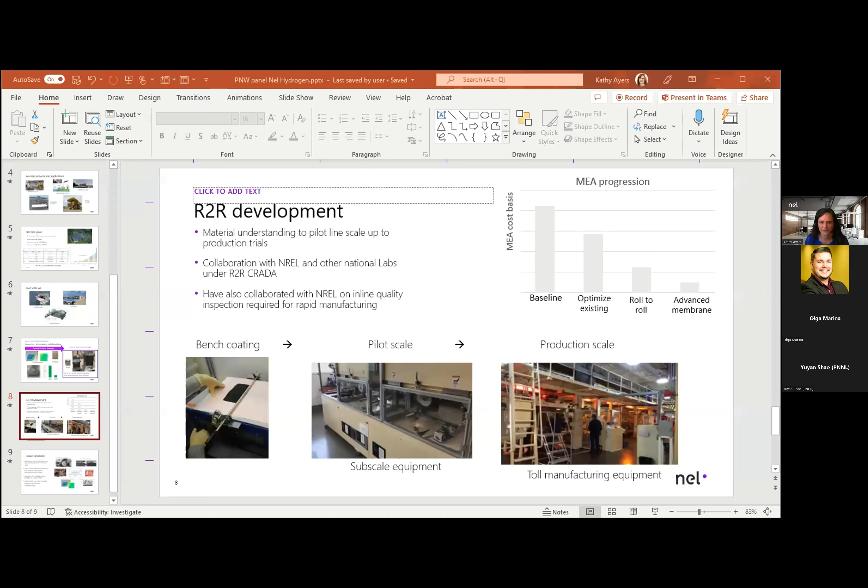All right, so I'll just quickly give a little bit of background on NEL so the other panelists can do the same for their companies and get into the Q&A. But for anybody who doesn't know who we are, NEL is about 500 employees. We're a pure hydrogen company focusing on water electrolysis and hydrogen refueling. So we have two production facilities on the electrolyzer side, one in Wallingford, Connecticut, which is where I'm based. That's where we make the PEM systems.

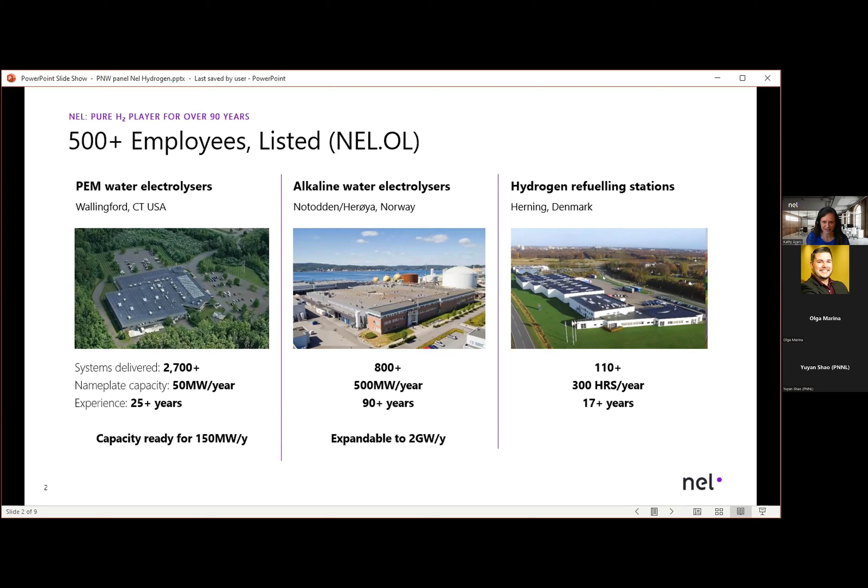We currently have been producing up to about 50 megawatts a year, but this facility can do about 150. And we are currently looking for a new site to expand. In Norway, we produce the alkaline electrolyzers. So we have a fully automated plant that was just commissioned this year, which is currently capable of 0.5 gigawatt of alkaline electrolysis, and they've already started procuring equipment for the second line. The building has space for up to 2 gigawatts. And then on the refueling side, we have a factory in Denmark, which can do up to 300 stations a year.

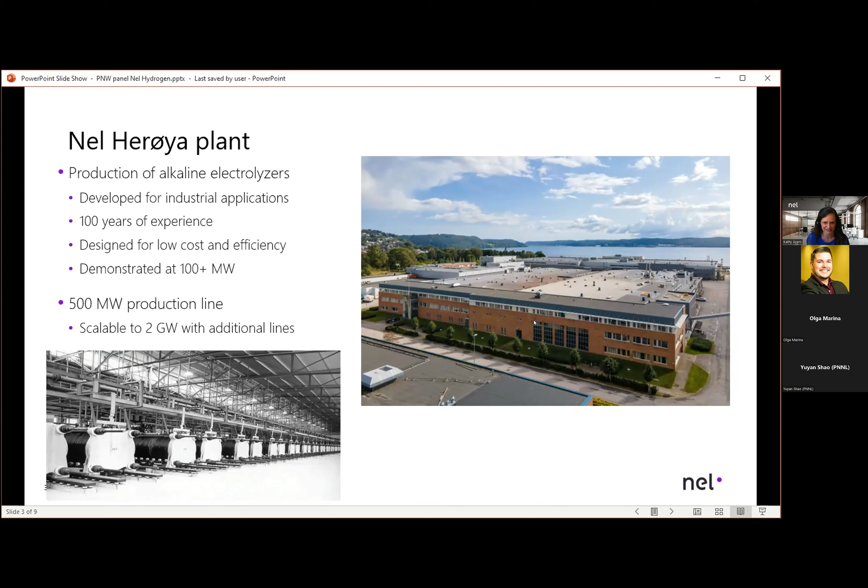So a little bit more on the Herøya plant. As I mentioned, this produces our alkaline electrolyzers. These systems were really developed for industrial applications from the beginning. So a lot of the cost has been taken out, but there's still room based on how old this technology is to incorporate modern automation, new materials, et cetera. But the NEL legacy goes back 100 years. And we've already demonstrated this technology at 100+ megawatts. There's a picture down below of one of our factories that operated for about 40 years. And as I mentioned, this new facility can produce up to 2 gigawatts.

Just some of the examples of projects on the alkaline side that are either already installed or have been announced, just to give a sense of the scale of systems that are going up today and what types of applications. So we have electrolyzers feeding a chemical process, which is about 9 megawatts of capacity. There's areas looking at home heating. That particular project is 5 megawatts to serve a community. Green steel is similarly about 5 megawatts for this particular demonstration, growable to much larger. And then mobility and mining are two of the other applications that we already have systems going into. So there's a wide variety of areas where renewable hydrogen can impact, and there's lots and lots of projects going on around the world for both PEM and alkaline.

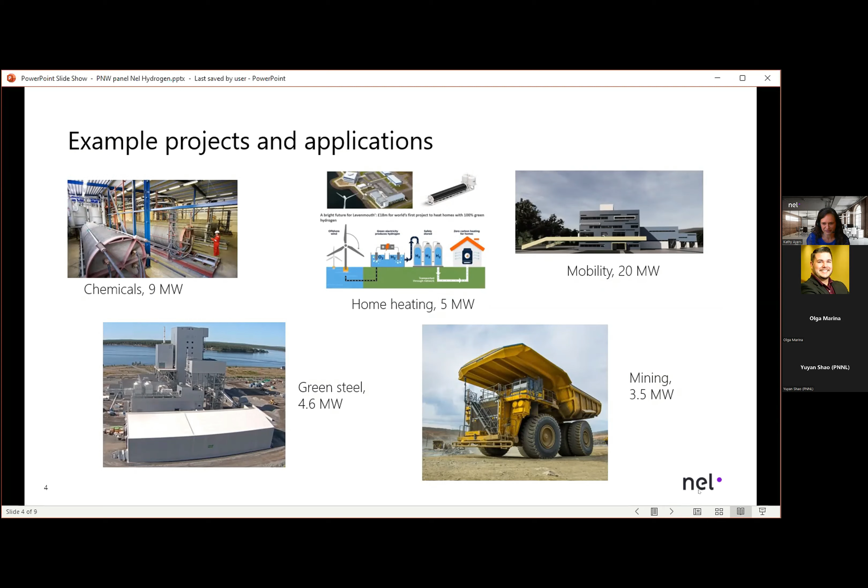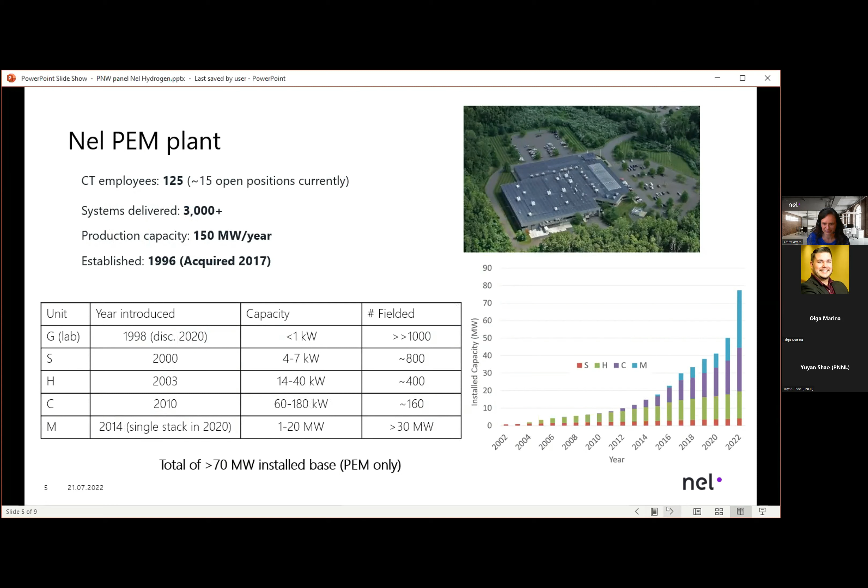Our Wallingford facility has about 125 employees, and we're growing rapidly. We hired somewhere in the neighborhood of 15 to 20 positions last year, and we have another similar amount open right now with continued growth expected. We've delivered over 3,000 systems to date. And you can see the growth in terms of the types of units that we're producing and the total installed capacity base over time. So we have systems in the 100+ kilowatt range going back more than a decade. And our megawatt platform has been around for about 8 years now. So we're growing quite a large base of products in these areas with about 70 megawatts installed to date, and several more projects that have been announced.

In terms of where the PEM products are mainly going, it's really more suitable for things like offshore wind applications because of the footprint needs, as well as the fact that you're tying directly into a wind turbine and the response times needed. We also have several projects in bus and truck fueling around the world. This particular one is in California. And we also have a green ammonia project that we've been doing with Iberdrola, which is the largest PEM installation that we have at 20 megawatts. And that is in the process of being fully commissioned, and has been partially commissioned this year.

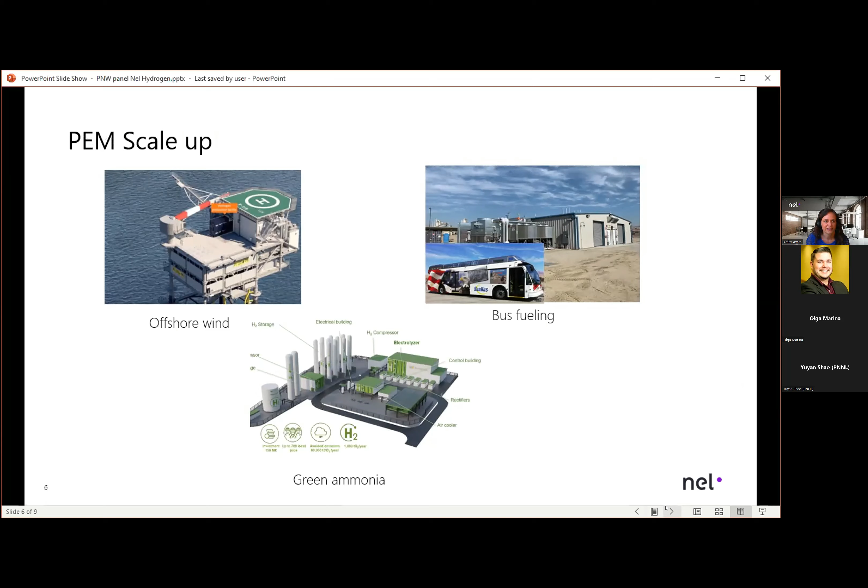One of the topics we were asked to touch on was benefits of lab and industry collaboration. This is a slide I've presented in other forums because it's a great example of how we can move from conceptual design and fundamental understanding all the way to commercial production. This was our bipolar plate project implemented several years ago. I still have my ECS Transactions paper from 2010 referenced a lot of places, and I have to keep saying it's not accurate anymore, because at that time the bipolar plate was the most expensive component in the stack, but this project changed that.

This was a project where we went from a clean sheet of paper, analyzing different plate designs, looking at stresses and flow characteristics. We worked with Oak Ridge to look at different coatings and how that impacted hydrogen embrittlement in the part, and we looked at completely different ways of manufacturing the plate. Through this effort, we were able to reduce the cost of that component by effectively 80%, in terms of both the manufacturing changes and the scale up that we did.

This component really forms the basis of our two largest cell stack platforms. We developed it initially at about 100 square centimeters and then scaled it to 700 and almost 1600. We've fielded thousands and thousands of cells with these configurations.

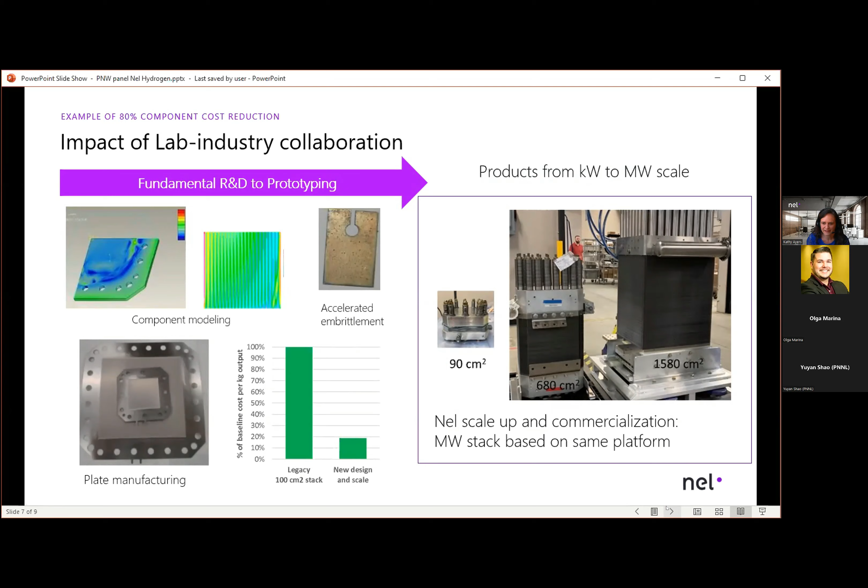Finally, looking more forward, roll-to-roll development is another area where we've been leveraging a lot of lab capabilities. This is now the most expensive component in the stack, the membrane electrode assembly. So understanding how we move that from a fairly low volume manufacturing process with thick membranes and high catalyst loadings to a much more streamlined part.

We've been working on this for a few years now through a DOE project that we've now moved towards an internally funded project to commercialize it, and that's actively underway. We started from understanding all the different materials, the ink formulations, the coating parameters, to scaling it up with a pilot line. This is an example of the roll-to-roll coater at NREL. We've also worked with Oak Ridge, scaling that to more of a production scale on toll manufacturing equipment before we go ahead and purchase our own.

We had a collaboration here with NREL and Oak Ridge, and there were other national labs involved in the roll-to-roll CRADA, which I know Plug has been involved in as well. NREL is also helping us figure out how, if we can make the parts, that's one thing, but we also have to inspect them at the same speed because you don't want to be making a bunch of scrap. That's an area where they have expertise as well.

So you can see, moving from the baseline, there's so much we can do in optimizing the process we currently have, but really moving to roll-to-roll and more advanced materials is what brings us down to those similar cost reductions as we saw with the bipolar plate.

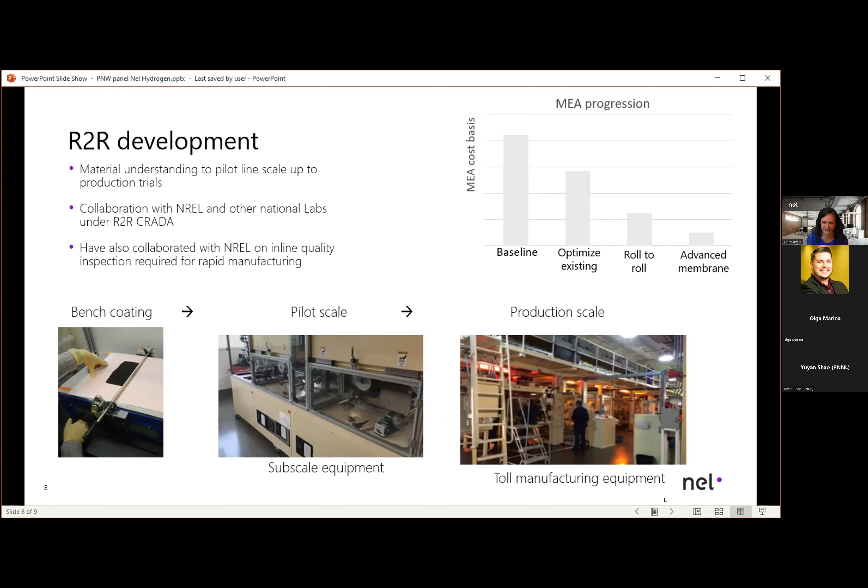So finally, just some thoughts. I think electrolysis is going to go through a lot of transitions in the next few years, a lot of scaling up in manufacturing of components and stacks. There's a lot of opportunities for material and process optimization throughout the supply chain, moving to robotics, automation, lowering the amount of noble metals we're using, et cetera. All of that requires high strength and fundamentals because we need to maintain reliability and quality over all kinds of applications, duty cycles, et cetera. I think that partnerships certainly result in faster progress and deeper understanding there.

So I'll turn it back to Olga.

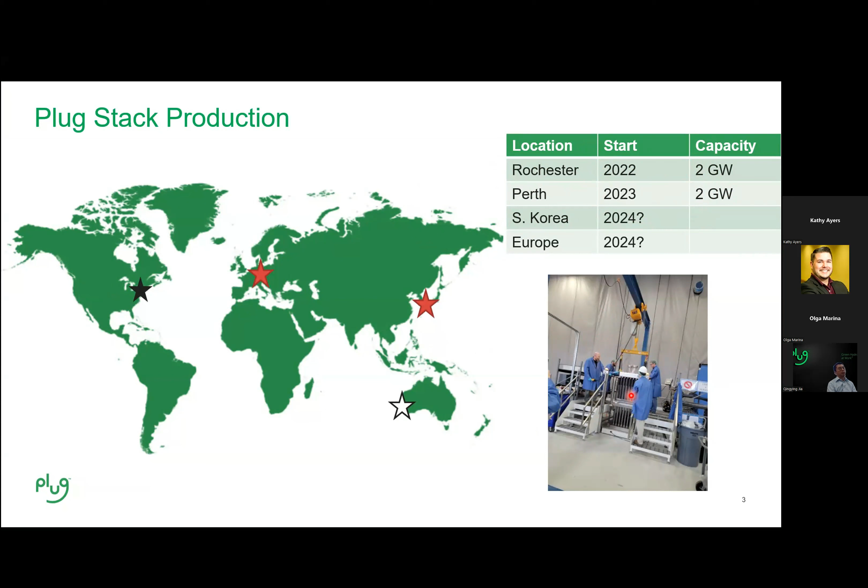So for a typical example, the 1 megawatt system can generate around 425 kilograms of hydrogen per day. And in addition to these,

And the plan is to generate 500 tons of hydrogen per day in North America by 2025, and 1,000 tons per day globally by 2028. That is basically the plan.

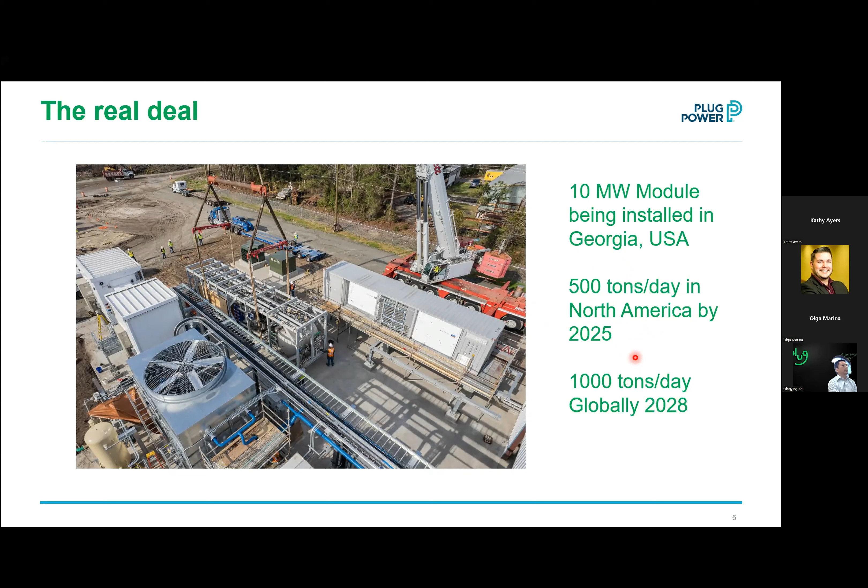One of the major R&D efforts here at Plug is to reduce the cost of the electrolyzer, or the green hydrogen, to make sure green hydrogen is competitive with other energy sources.

On the left side is a typical cost analysis of a typical MEA. So for the past 2 years, we have been able to reduce the cost of the MEA by more than 50%, from here down to here.

In the future, by optimizing the MEA, there are 2 directions to reduce the cost. If we maintain the current density and increase the efficiency from 75% up to 85%, we can reduce the cost of the energy by around 15%.

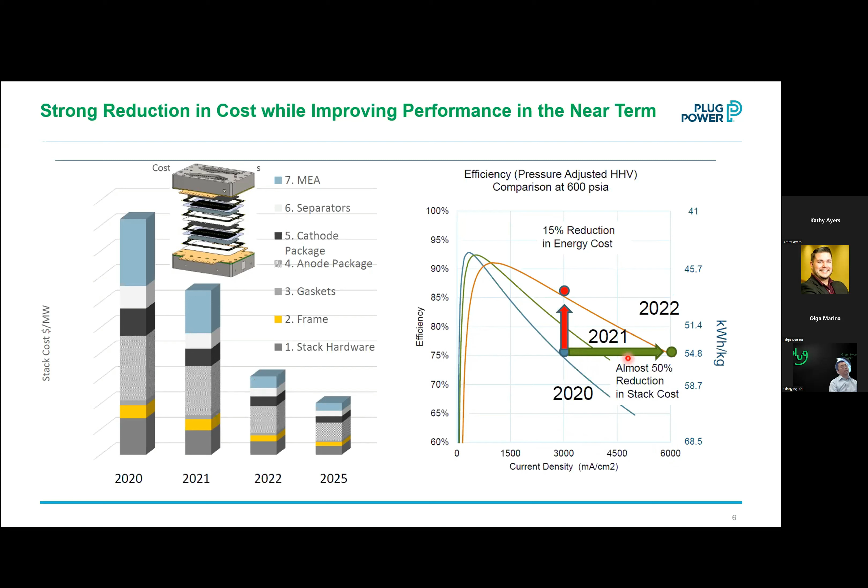On the other hand, if we maintain the same efficiency but increase the current density from 3 amps to 6 amps, we can basically reduce the cost of the stack by around 50%. That is a big saving, and the major reason behind that is we can use less stack to make the same amount of hydrogen per day. So those are basically 2 major directions to save the cost.

There's another concern with the electrolyzer, or the green hydrogen generated by it: the use of iridium. Iridium is not only expensive because it is the rarest noble metal around the world, as shown on the left side, but right now we generate approximately 8 tons of iridium per year, as shown here.

Because of the very limited source of iridium, the iridium price has increased very sharply recently due to increasing demand. So it becomes a very expensive part of our MEA. But that is not the only concern, and not the major concern.

The major concern is we don't have enough iridium to support all the electrolyzers, because the electrolyzer industry has been expanding very fast. You can see the sharp increase in iridium price here is probably due to demand increase by the electrolyzer, and there's also other demand for iridium. So I think there's a mismatch between the iridium we have and the iridium in demand.

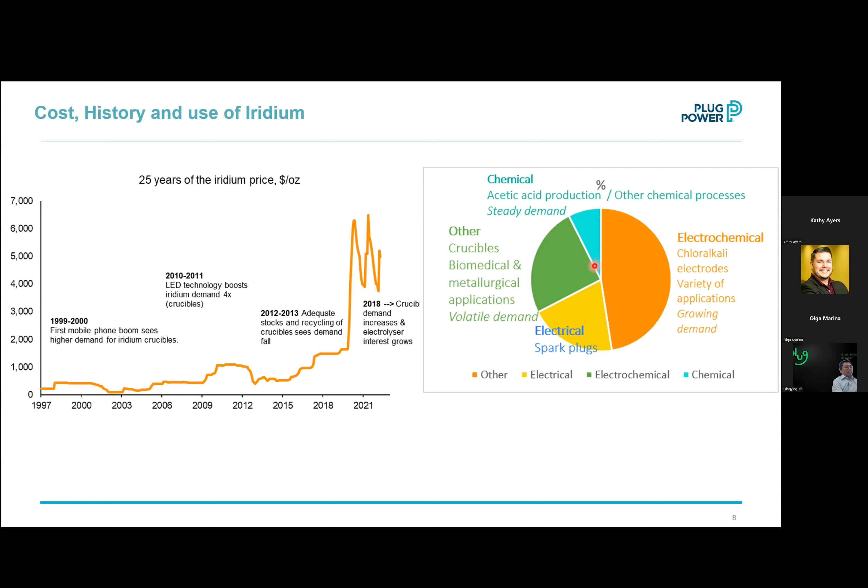So one solution is to decrease the iridium loading in the PEM electrolyzer. Fundamentally, it is feasible because, according to the fundamentals of chemistry, at higher current density we need less iridium. For example, at 0.5 amp per centimeter squared, you can see the performance is reduced with lower iridium loading.

But if you go to like 5 amp per centimeter square, the performance is around the same, even with very different iridium loading. So that is basically the fundamental feasibility of lowering the iridium loading.

Practically, there are several kinds of advanced iridium-based catalysts that can decrease the iridium loading by 1 order of magnitude. For example, the top one is a typical supported iridium catalyst developed by Giner and now at Plug Power. The bottom one is another supported iridium catalyst developed by 3M.

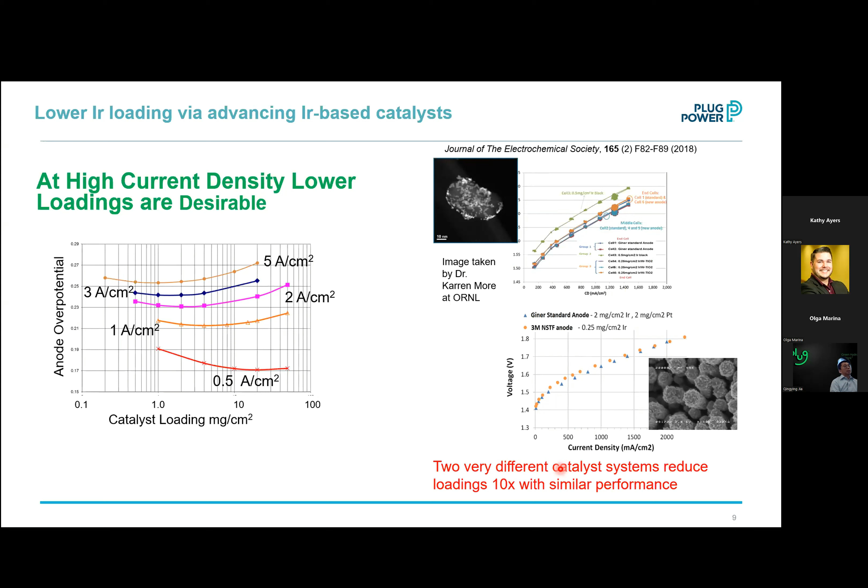Even though these are 2 very different catalyst systems, they can basically reduce the loading by 10 times with similar performance. Which means practically it is possible to reduce the iridium loading without sacrificing performance, which can potentially resolve the limited source of iridium issue.

This is basically an estimation of how much iridium we need in the future and the cost.

So around 2032, if we can increase current density to 6 and reduce the iridium loading down to 0.1 milligram per centimeter squared, we can reduce the cost down to nearly $2,000. Let's say by 2032 we can reduce the loading so the iridium cost is around $10,000 per megawatt. And if we increase the lifetime to 20 years, the cost for the iridium is like 1 cent per kilogram of hydrogen. It's not too bad, assuming 8% cost of capital.

But you can see from here that it is very important to increase the lifetime—not only can that reduce the cost of the iridium, but it also makes recycling less important. The shorter the lifetime, the more important recycling becomes. If the lifetime is 5 years, recycling can significantly reduce the cost of the iridium. But if it's long enough, recycling plays a minor role. So this is basically the vision regarding whether we can reduce the iridium loading and whether it is feasible.

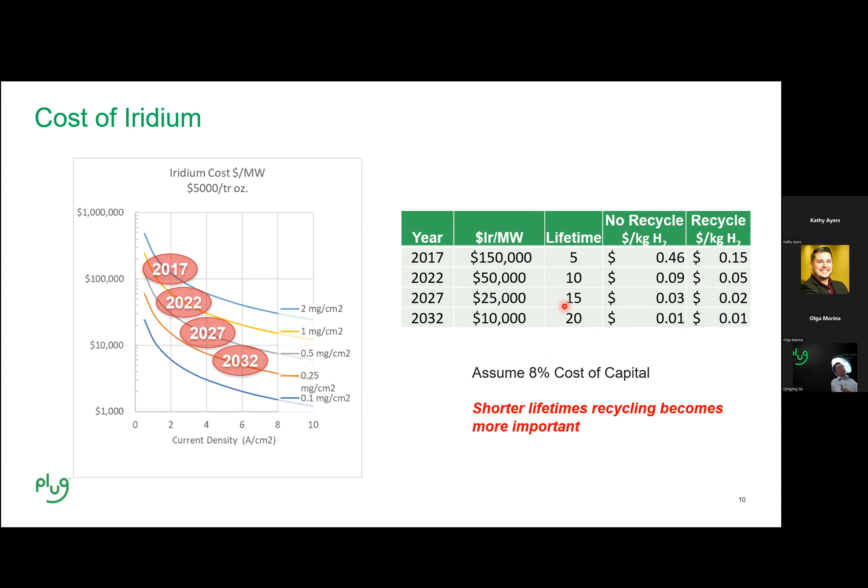But the key question is—I think here we need a lot of R&D help from national labs and universities—how we can reduce iridium loading down to 0.1, and in the meanwhile increase the lifetime, which by far is the most difficult and tricky challenge there. I believe by far nobody knows the answer. That is where the R&D, and also our R&D team at Plug, is working. I think this is a big direction, a big challenge to go. And that'll be all. Thank you.

Thank you very much. And you almost answered all my questions that I was going to ask you.

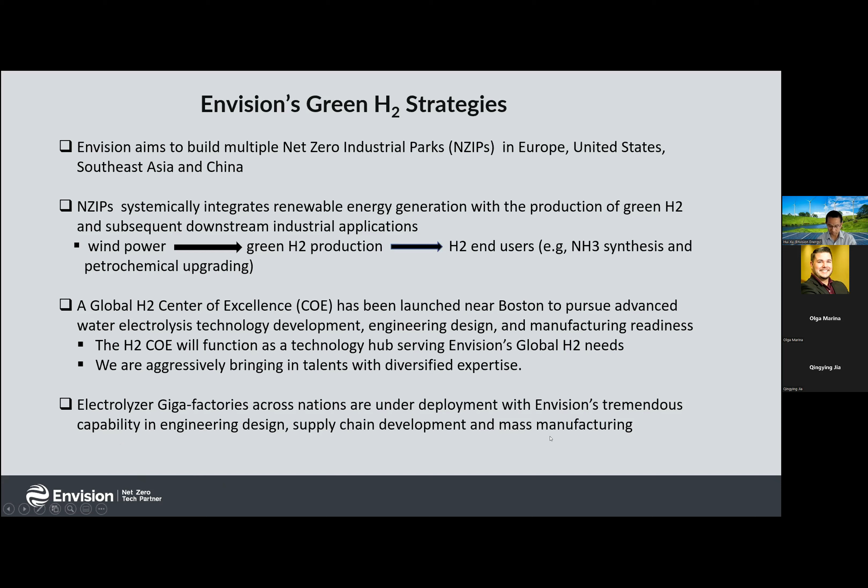This is only the center. In the meanwhile, Envision is also looking at giga-factories across different nations, currently under deployment, because Envision has tremendous capability in engineering design, supply chain development, and mass manufacturing. Looking at Envision's electrolyzer technologies, we've focused on low temperature water electrolysis technologies, but with different focuses.

One is alkaline liquid electrolyzer technology. This has existed for many decades but has gained momentum recently because of its low price. For this technology, we are working hard to improve current density — currently for commercial products it's only about 500 milliamps per centimeter squared, and we hope to improve it by 3 or 4 times.

For the PEM electrolyzer, the focus is cost reduction. Jia talked earlier about iridium price, and Cassie talked about other expensive components, so Envision is trying to use our expertise and resources to reduce the cost tremendously.

The last one is AEM electrolyzer technology, which is more advanced. Right now the concern is lifetime, so we are working with some membrane companies to try to improve the lifetime of this AEM electrolyzer.

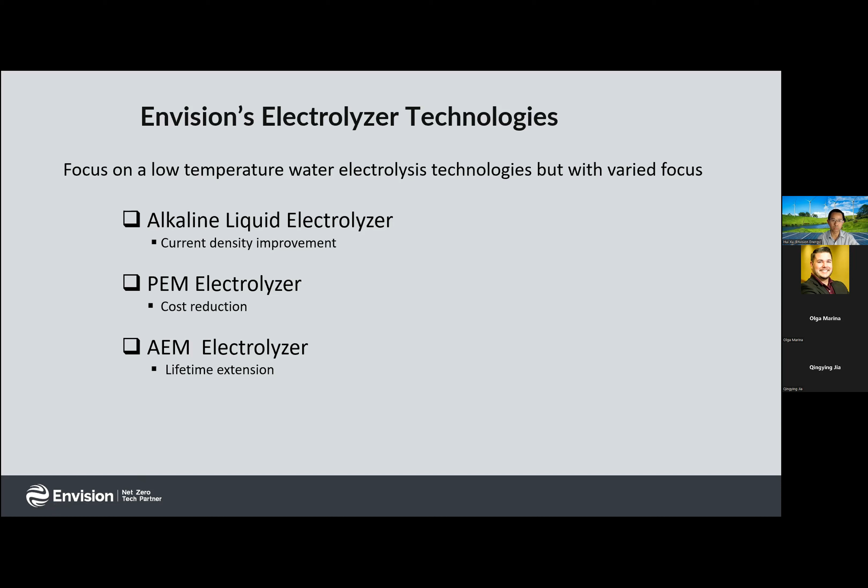So all three of you were talking about different electrolyzers for hydrogen production, but there are other technologies to produce hydrogen. What is the most appropriate way to make green hydrogen? Would it be alkaline, PEM, SOEC electrolyzer, or should we also consider methane pyrolysis and fossil fuel conversion with carbon capture?

I would say the simple answer is whatever's cheapest for that set of conditions. I think there's room for a lot of technologies. High temperature is good when you have a heat source, though it's maybe not quite as mature as alkaline and PEM yet, but I think that's where its sweet spot will be. Alkaline is good for large areas where you have plenty of space and relatively slow ramp rates, and PEM is good for more constrained environments and high dynamic range.

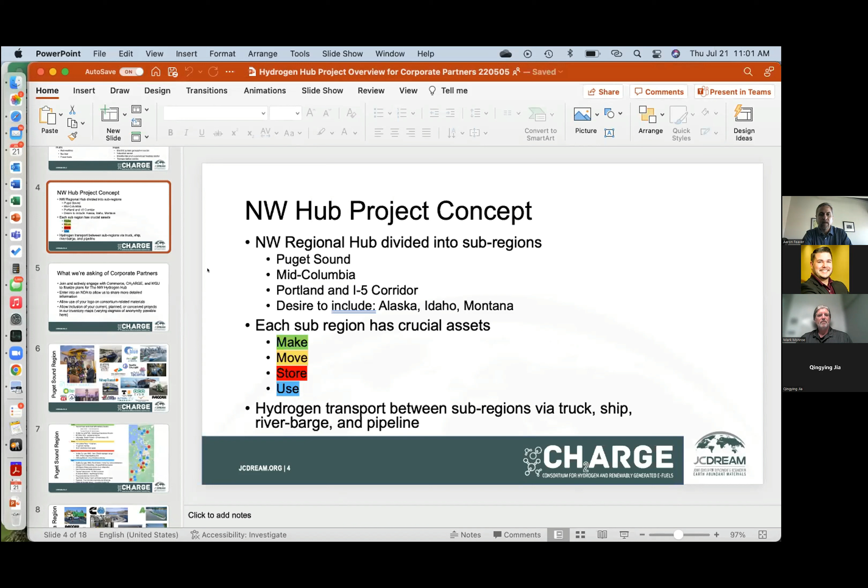I might share a couple of slides real briefly to show you guys what we're thinking about here with the Pacific Northwest Hydrogen Hub. I'm going to share my screen, hopefully that works. Okay, I think that's working. So the concept here is... is that working? Yeah, perfect.

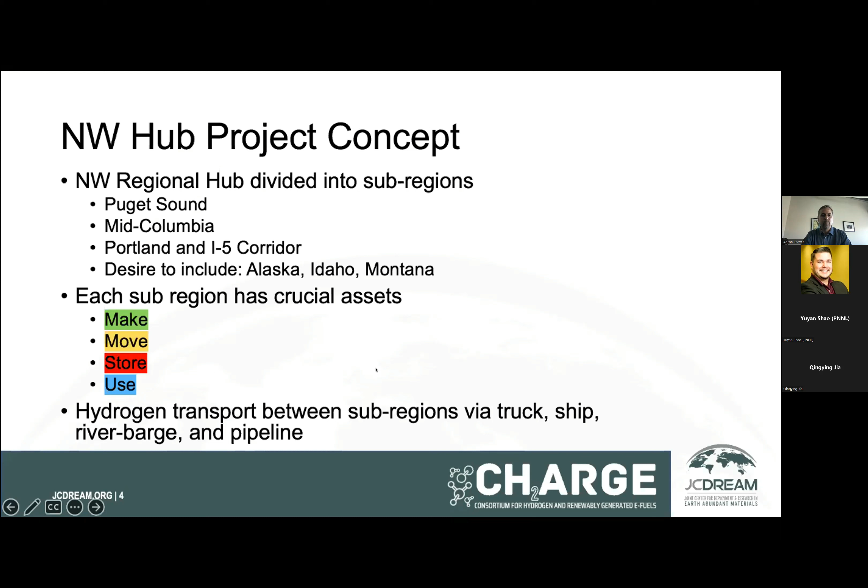The Northwest Hydrogen Hub, we're going to divide up into subregions where we want to geographically align the production, make, move, store, and use—production, transport, storage, and consumption of hydrogen—all in geographically compact regions, and then provide hydrogen within those subregions. This is a handful of the different types of things that are already going on around the Puget Sound region. We've got companies like First Mode that have developed hydrogen earth movers. We've got All American Marine, which has developed some of the first hydrogen ferries. There's a big emphasis on ports.

Here, I'll show you all—I don't know if that shows up or not. I'm actually at the Port of Seattle right now talking about how we utilize hydrogen to reduce emissions in port operations, oil refineries in the Puget Sound region. All of these are areas where we're putting some emphasis. This just kind of shows you some of those make, move, store, and use projects that are going on in the region around the Puget Sound area.

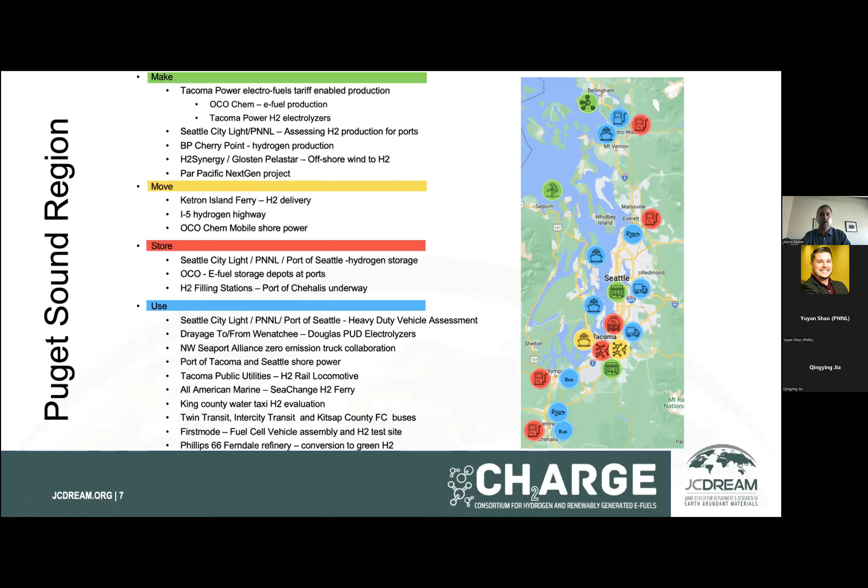In Eastern Washington and Northeast Oregon, we have a similar story. There are a number of hydro dams, data centers, warehouses, and opportunities for utilizing the Columbia River, both for production and transport, and then aviation—hydrogen-powered aviation is another area that we're focusing on. You can see the same sort of thing. This may not make as much sense to folks outside the region, but this is the upper Columbia River, where a lot of the hydro assets are in parts of Eastern Washington and Eastern Oregon.

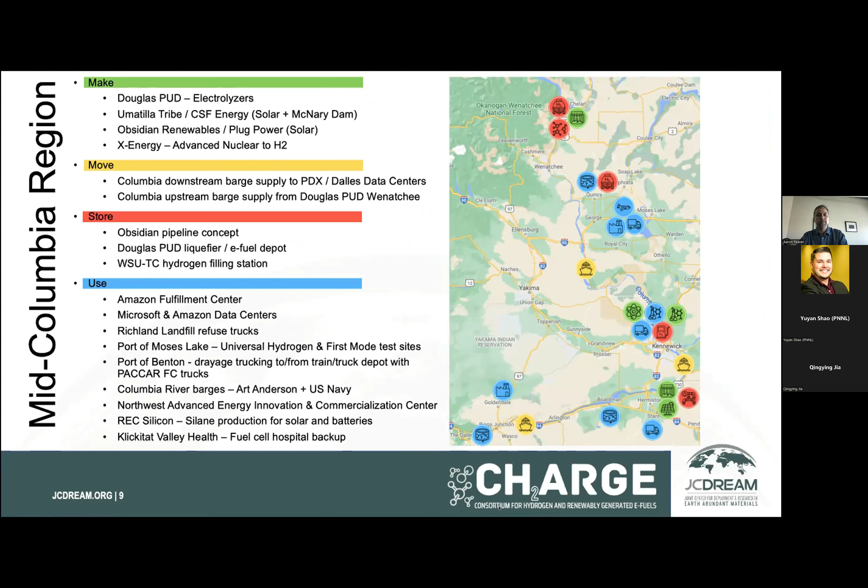Anyway, I don't want to take too much time, but that's just a quick overview of some of the things that we're considering as part of our hydrogen hub here in the Pacific Northwest. And I will go ahead and...

Introduce our first panelist, who is Ronen Aronov from Cummins. Ronen is the director for the program for the new power business unit. In Ronen's previous role, he was responsible for the power electronics and motor generators product line at Cummins, launching the product line earlier in 2018 and leading development programs for a number of products integrated into hybrid, battery electric vehicles and fuel cell powertrains.

Before joining the New Power business unit, Ronen held a number of commercial positions at Cummins, aftermarket in Europe and North America. Prior to joining Cummins, Ronen worked in the semiconductor industry. And I will also just highlight that Cummins is an important player in the Pacific Northwest and one of the electrolyzer producers for some of the first projects that we've seen here in our region. So looking forward to hearing what you have to say, Ronen.

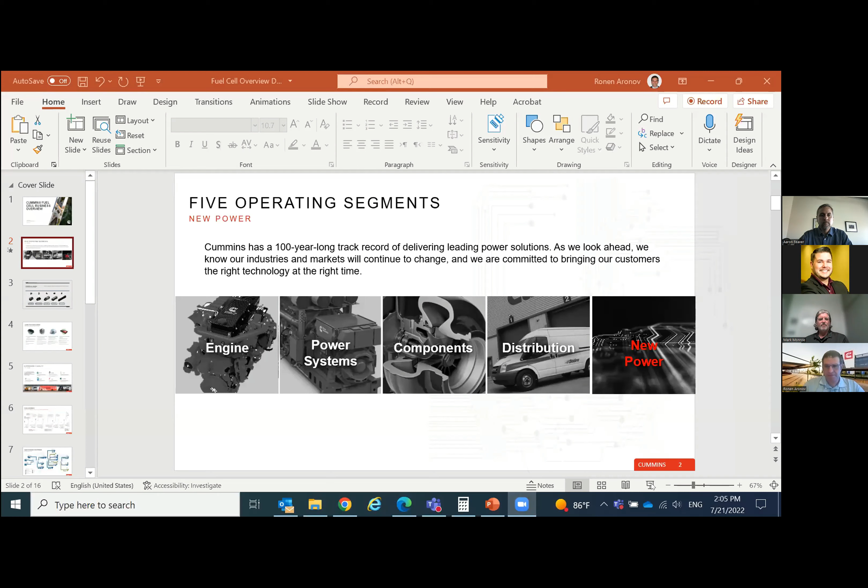Excellent. Thanks, everyone, for the introduction. So, yeah, I prepared a few slides just to introduce Cummins, a few of the projects we're doing. So I'll share my screen. Just let me know when you can see it. Looks good. Yeah, perfect.

So, a short introduction on Cummins, how Cummins is structured and built. Cummins has 5 business units in total, 100 years old.

Was planning on using my 100 years t-shirt, but I didn't know if a t-shirt was the okay shirt for this occasion, so I switched.

The biggest business unit that we have is obviously the engine and the diesel engines. We have a power system making generators, making components for all of these power systems and engines. We have a very large distribution network, and our newest business unit, which is where I work, and I've been working the last 4.5 years, is what we call New Power business unit.

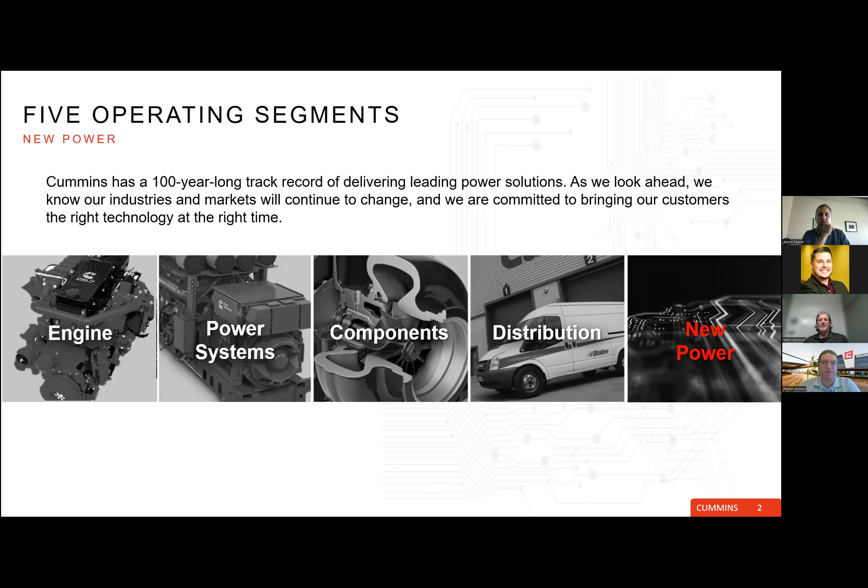From a Cummins perspective, I think the main goal, and Cummins has an initiative called Destination Zero, which aims at getting to zero net emission by 2050. And the goal is to reduce emission and be a power of choice for all of the different technologies that exist, right? Or maybe not all of them, but at least what our customers would like. So a customer would be able to take a different technology all by Cummins.

So obviously we have the traditional diesel powertrain, which there is a lot of investment on reducing emissions on these engines as well today. There's the natural gas powertrain. We have hybrid electric, so batteries and engine together, the fully battery electric, and the fuel cell electric.

From a fuel cell and core technologies of our New Power business unit, we are structured into 4 different businesses, or 4 different product lines, I would say. The fuel cells is where I am working at. And we have hydrogen generation, stationary fuel cells, and batteries.

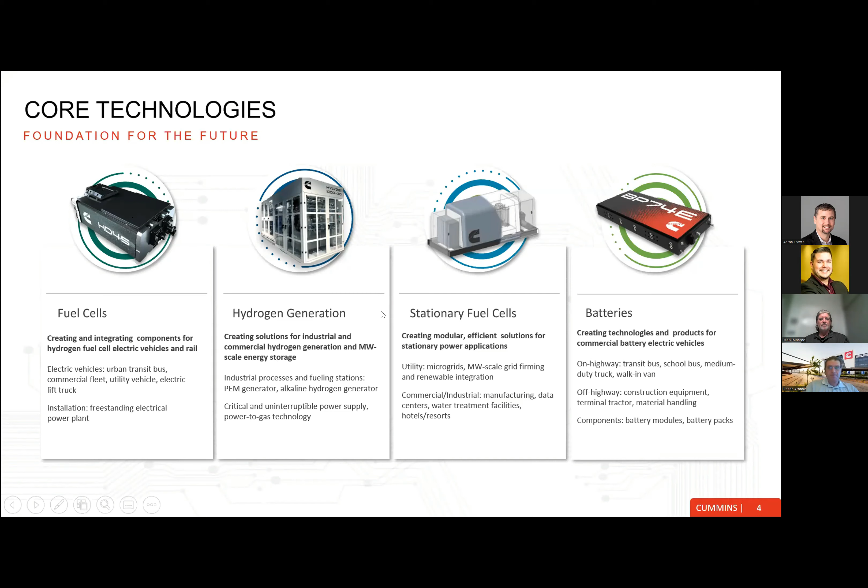A little bit about our New Power business unit. We are about 1,400 people out of the total over 60,000 Cummins has. So compared to the rest of Cummins, we're relatively small, but still not very small and growing quite fast. Cummins is located in over 190 countries, and I will show a little bit about where our New Power facilities are located. But there is Cummins representation in almost every country that the US is allowed to do business with.

And we have over 70 years of combined hydrogen experience through some of the acquisitions that we have made. Over 500 battery electric powertrains in the field, 600 electrolyzers, and over 2,000 fuel cells powering in demo vehicles and commercial operations. A little bit about the Cummins journey and how we got involved with new technologies and why we are positioned well there.

Cummins was actually investing in new technologies and zero emission technologies for quite a long time internally. But in 2017, really the big push came out and Cummins started with a number of different acquisitions. So we acquired 2 battery companies in 2017, Brammo and Johnson Matthey. Later on, we acquired a number of other companies, mainly in the drivetrain solutions, such as EDI in California.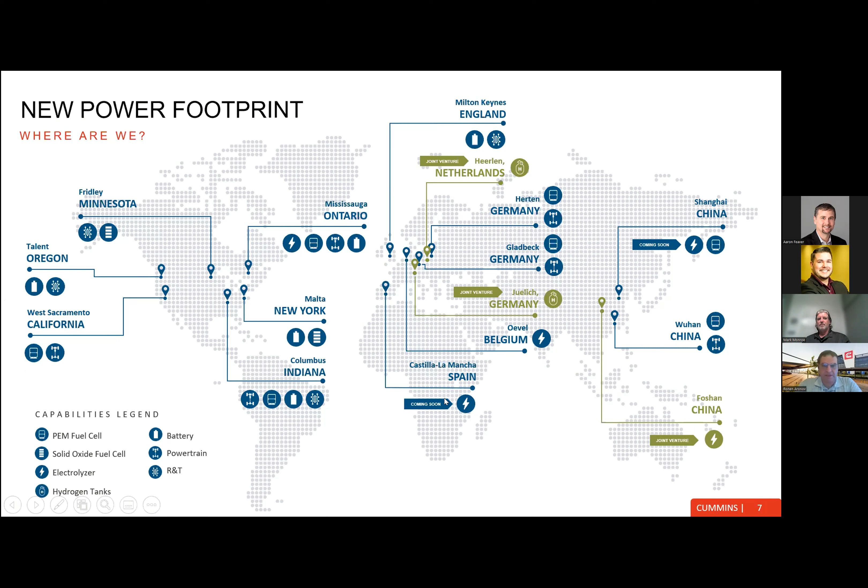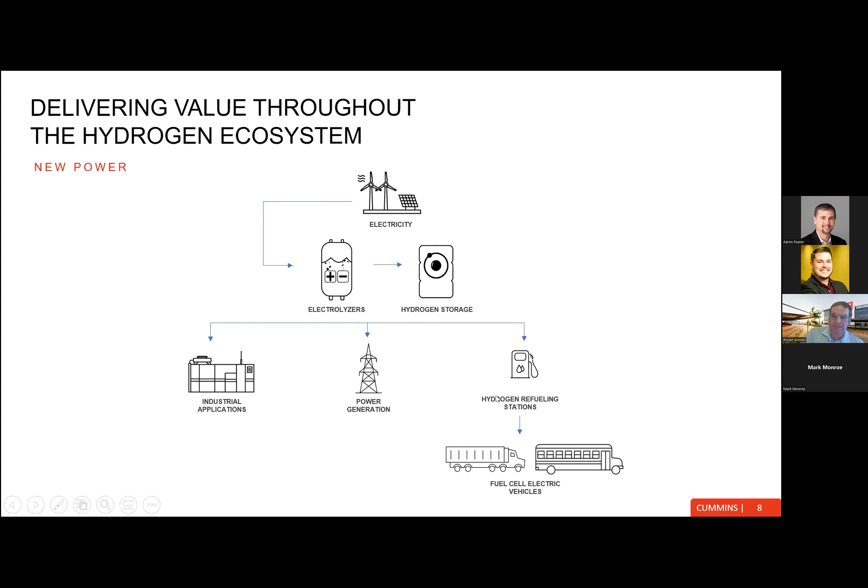So from a Cummins perspective, we're looking at this whole value chain and ecosystem of hydrogen, right from the production of electricity, which Cummins is actually a big participant in through our power generation business unit, all the way to hydrogen storage and electrolyzers, and obviously going to the end user and the fuel cell electric vehicles and any other applications that we may participate in.

From a product perspective and what we do, we start from the single cell, and that's specifically probably my product line, the fuel cell, the PEM fuel cell. And we also go through to the power module and eventually to the whole fuel cell system, being modular and being adaptable to the customer needs.

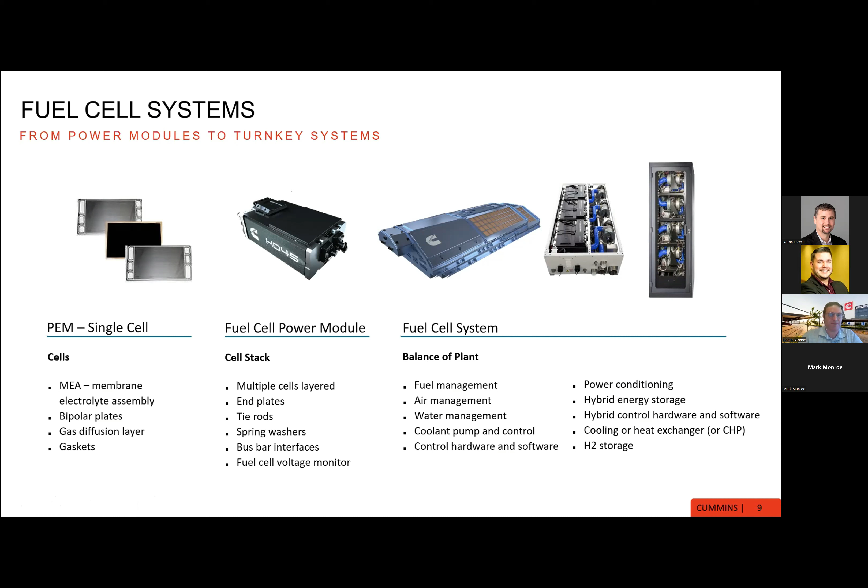And I have a few examples of vehicles and projects that we have done and have in the field. Some of the existing projects are on Scania trucks and Alstom passenger trains, and these are actually operating today in Europe. We also have quite a few demonstrators, as can be seen here in the images. The Class 8 is actually a vehicle that was prepared for the Port of LA using our fuel cells and some of our power electronics as well. And we can see the range of applications that Cummins has participated in.

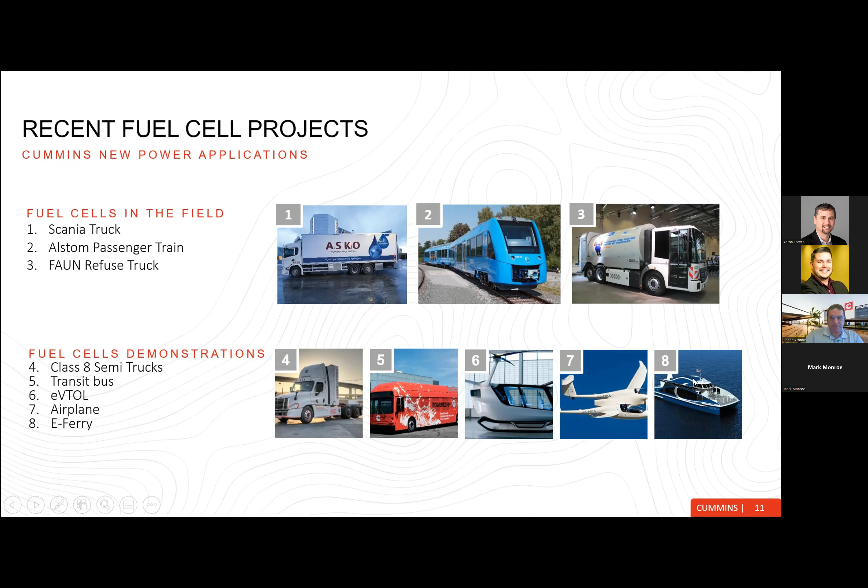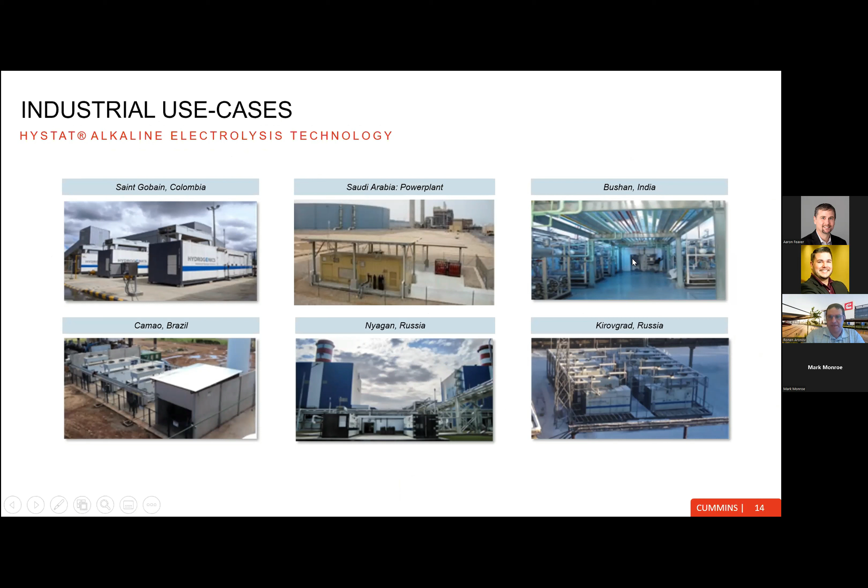And some of the projects that we have on the electrolyzers, essentially we have both alkaline and PEM. So these are some of the locations where we have alkaline projects, in Colombia, India, Russia, and Brazil, and some of the locations where we have the PEM projects. I don't see the one in your area on here, but we should add it. So that was briefly about Cummins, and that's what I had.

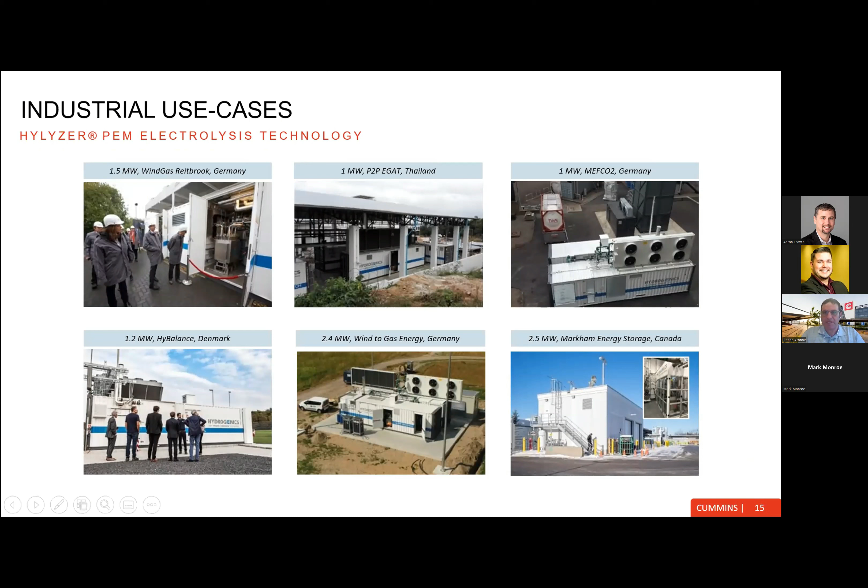Thanks, Ronan. Very, very informative. Yeah, the electrolyzer here in Washington State is set to be installed this fall or early next year. So once it's installed, we'll take an image and add it to the presentation. It'll be at Douglas County Public Utility District at the Wells Dam in Eastern Washington. So we'll keep an eye on that one.

But sorry, I missed the first half of the panel. So are we doing questions after all the panelists have spoken or in line? Yes, Aaron. The other speaker will talk and then we do a Q&A session. Sounds good. So next we'll go with Max Cimenti with Ballard Power Systems.

And I will introduce Max. Max is a principal engineer and scientist at Ballard Power Systems. He obtained a PhD in chemical engineering from the University of Calgary, working on anode materials for the direct utilization of alcohols in solid oxide fuel cells. In 2008, he started working on PEM fuel cells, where he was involved in electrocatalysis research, cathode and anode electrode engineering and design, and advanced methods for in situ characterization of membrane electrode assemblies. He's currently leading a project on MEA components integration for the Ballard next generation products.

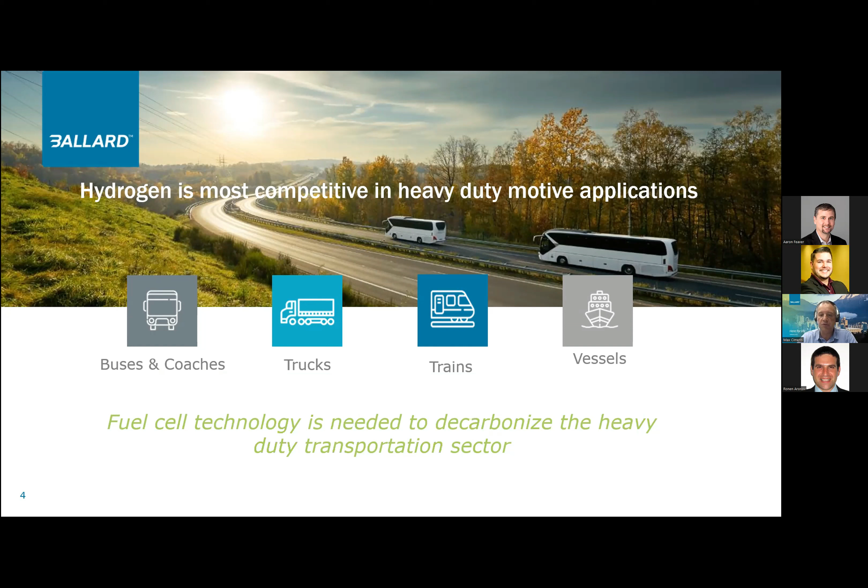And finally, in marine applications, Ballard Europe is collaborating with various developers to decarbonize cruise ships, ferries, and river barges using FCwave systems. So in summary, we believe that hydrogen fuel cell technology is the preferred solution to decarbonize heavy-duty transportation, and we already have solutions for this.

So now the next slide is intended to summarize what we believe the challenges and needs are to satisfy the near and future needs regarding PEM fuel cell technology, focusing mostly on MEA technology. And this is one of the questions that I believe was intended for this panel.

So the first aspect regards MEA reliability for heavy duty applications. The main objective now is to meet cost requirements for our products without sacrificing stability and durability. To do so, we need a fine-tuned optimization of our electrode and MEA designs, and of course trade-offs are necessary. And we need a very up-to-date list of specifications and requirements for the components. This is extremely important for quality analysis and control, especially if we envision a high volume manufacturing scenario.

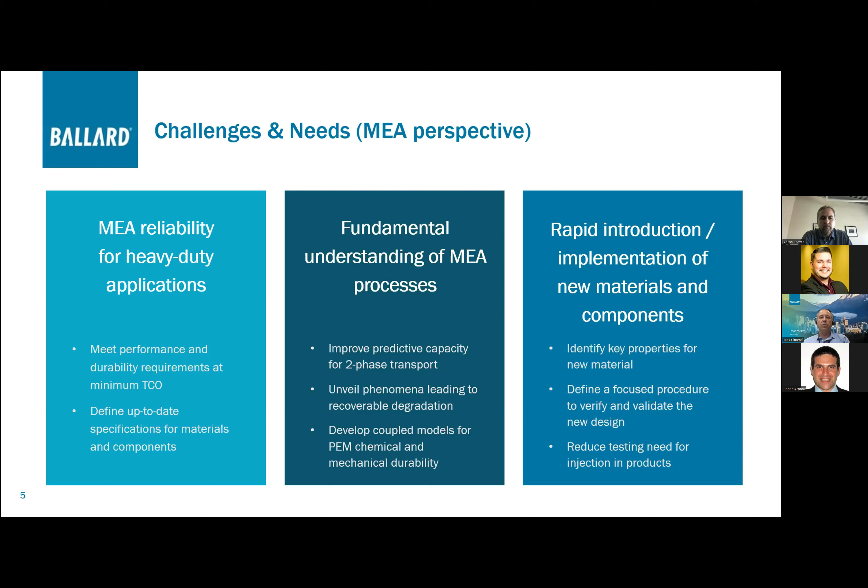Then the second is focusing on the fundamental understanding of the catalyst-ionomer interactions and what kind of impacts this has on performance as well as durability, and what kind of leverages we can play with.

And then also material stability and impact on degradation by-products. This should include mitigating strategies, for example, what type of operating conditions or operating changes should be used to get rid of some poisons in real products.

I'll give one more quick example. Boydton is a town in Southern Virginia near the Virginia-North Carolina border. If you look, the light yellow outline is the town of Boydton. The darker yellow are pieces of land that Microsoft has purchased that we intend on building data centers on. So we are building at huge scale, and it's driven by demand.

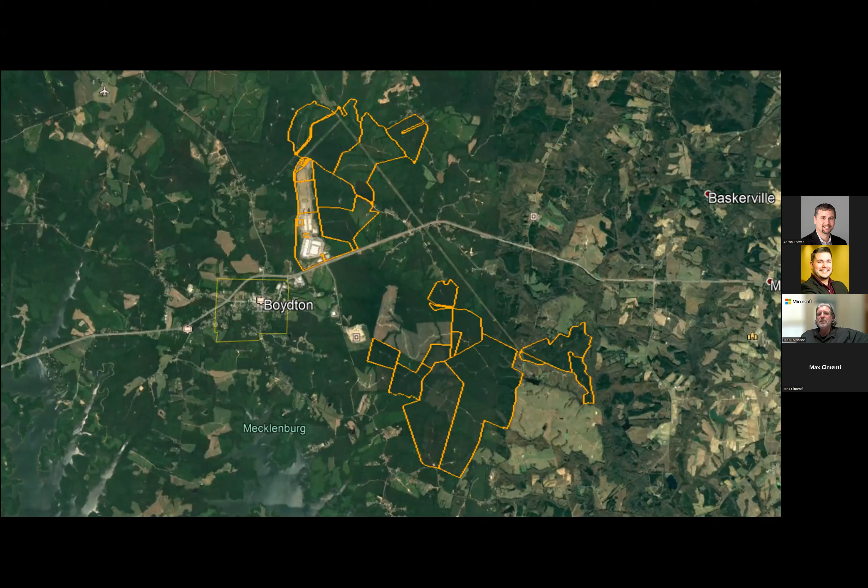We're not doing this for our own good. We're always driven by demand. There's constant demand for this digital infrastructure.

So let's talk about the proton exchange membrane fuel cells we've talked about, where we've started to use these for backup power. Apologies, my picture has a CAT sign on it, but hopefully you aren't too put off. Generators, whether from CAT, Cummins, or other suppliers, are critical to the electrical infrastructure required for the availability of the internet. The problem is diesels are noisy, they're polluting, everybody uses them, but nobody really likes them around there.

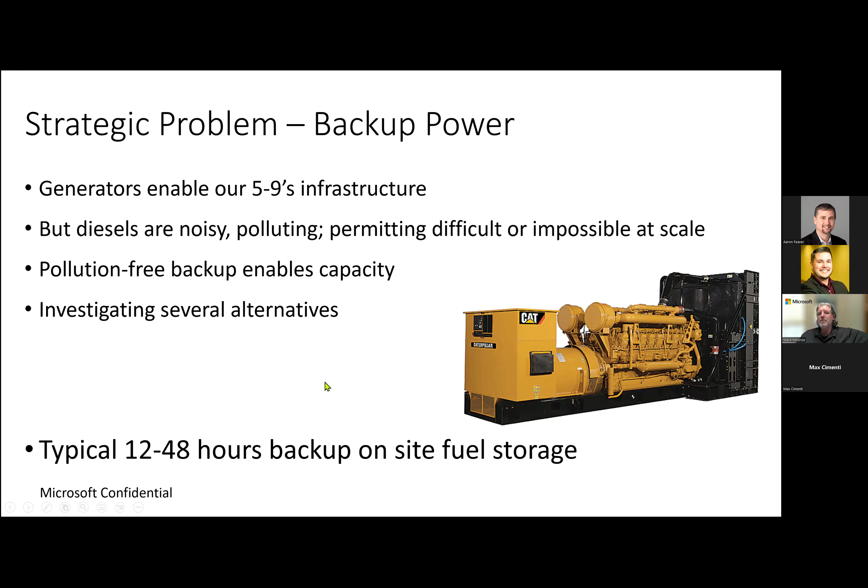We typically have to have fuel for 12 to 48 hours of backup power available on site in storage, and then we'll replenish from there.

In 2018, we saw a demonstration at the National Renewable Energy Lab, put together with our consultation, equipment from Hewlett-Packard and Daimler, integrated by a company called Power Innovations. This was a 65 kilowatt Daimler fuel cell running one rack of equipment. It was a basic functional demo.

It showed we can start the fuel cell, the batteries will take over for a short time, and we can use the fuel cell as the primary power source. It'll react to the load shifts that happen with computers, and it'll work just fine. Well, we said we've got to scale that up.

So in June of 2020, we demonstrated what I call a row of computers, about a 250 kilowatt system using 4 Daimler fuel cells. This was tested successfully, and I'll just flip through some pictures.

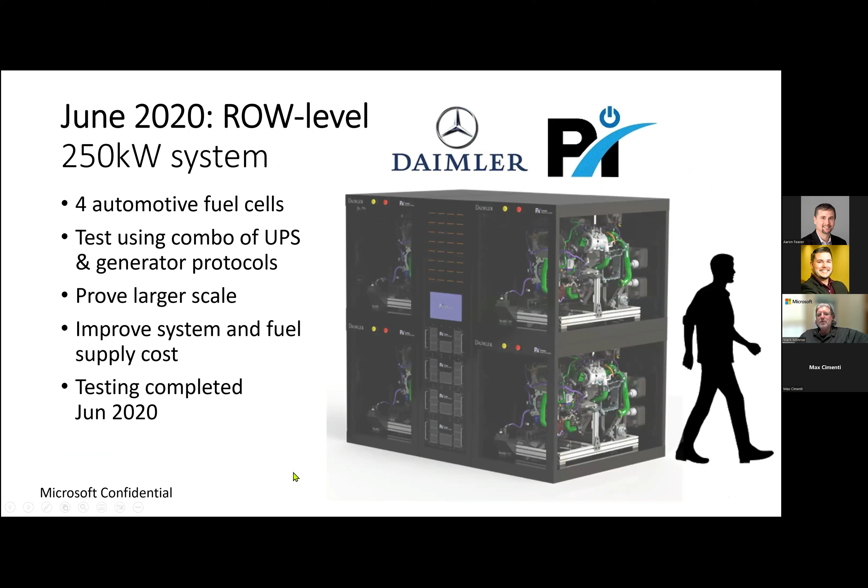This is the actual unit, the 1, 2, 3, 4 fuel cells. The center contains hydrogen distribution and some control electronics. The control was mostly software driven, on the lower right-hand side. This was the room where the fuel cell generator is, back here, with a lot of the support staff.

This was the row of computers that we ran. Not every one of them is a computer, but they act like a computer for an electrical system. They have capacitive load, inductive load, resistive load. So the electrical system gets exercised.

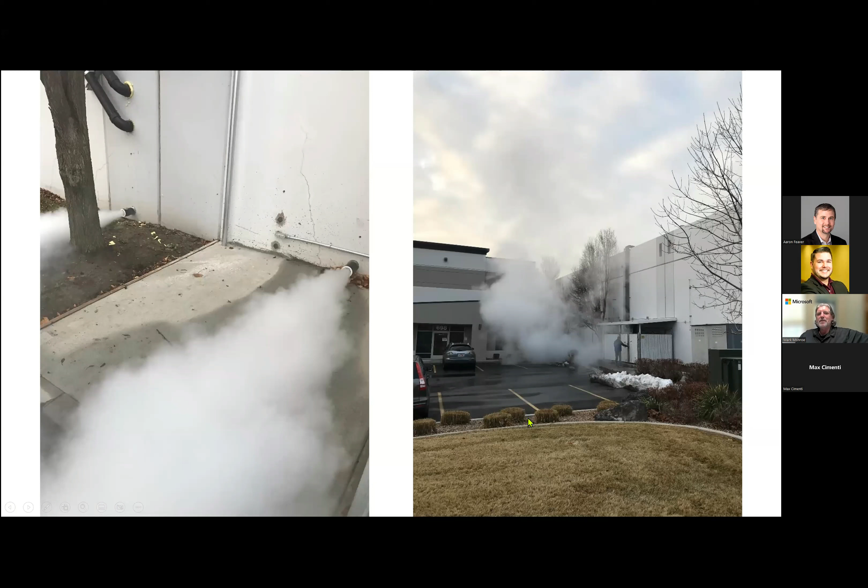The hydrogen storage we used in this case was gaseous. We had 4 of these trailers. We had to do a live swap when we did long duration testing.

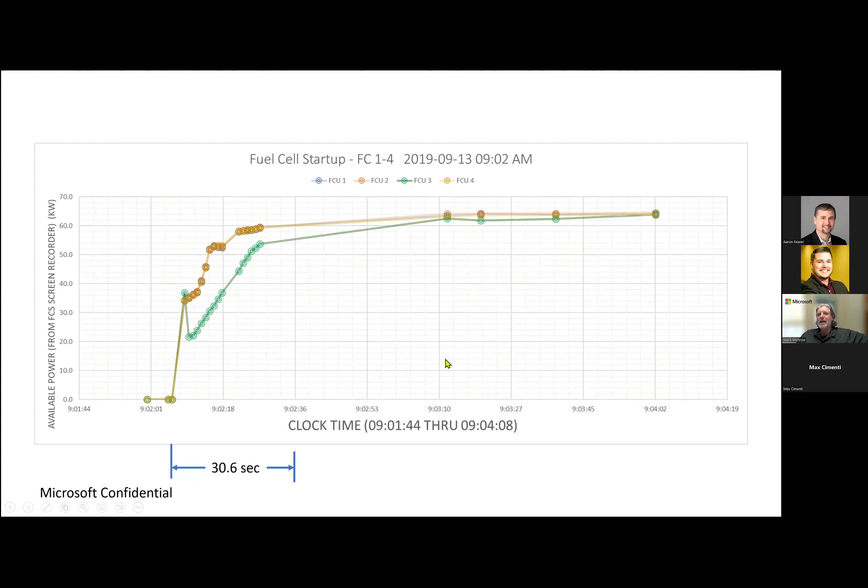We did verify things like startup time and reaction to load. We made sure we actually ran this through the qualifications we do for diesel generators, including a 24 and a 48-hour duration test. And then we published some information about this about 2 years ago, in July of 2020.

One of the things we said during that article was that we were going to continue on, because now we have a 250 kilowatt system. We need to get up to multiple megawatt systems, and we've been working on that development ever since.

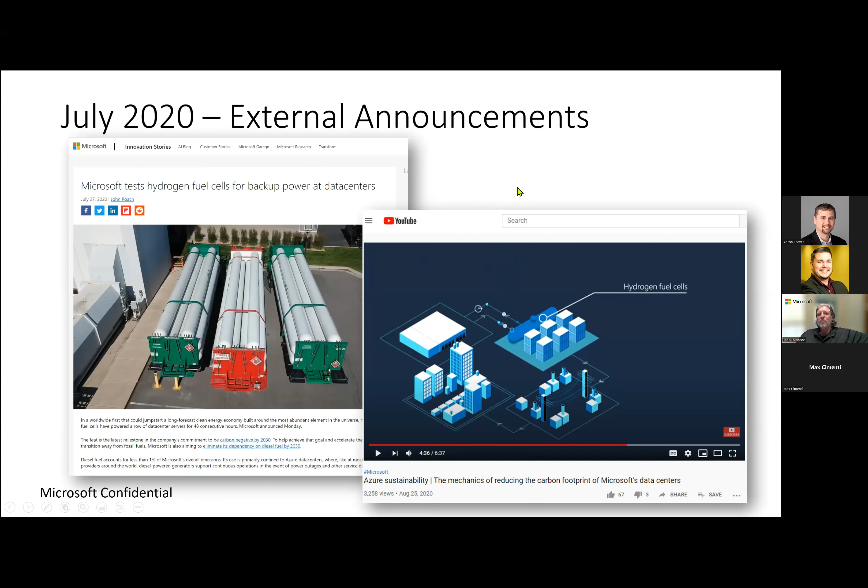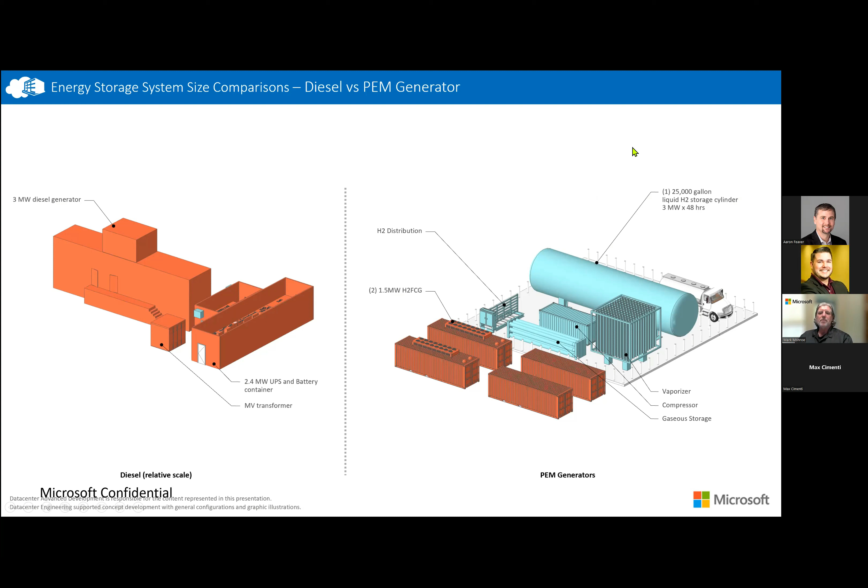So we're continuing to move forward with a design like this. But we're also excited about the possibility of data centers participating in this kind of integrated hydrogen economy. We will need to store a lot of liquid hydrogen in order to meet that 12 to 48 hours of backup time. And there are other things we might be able to do with that.

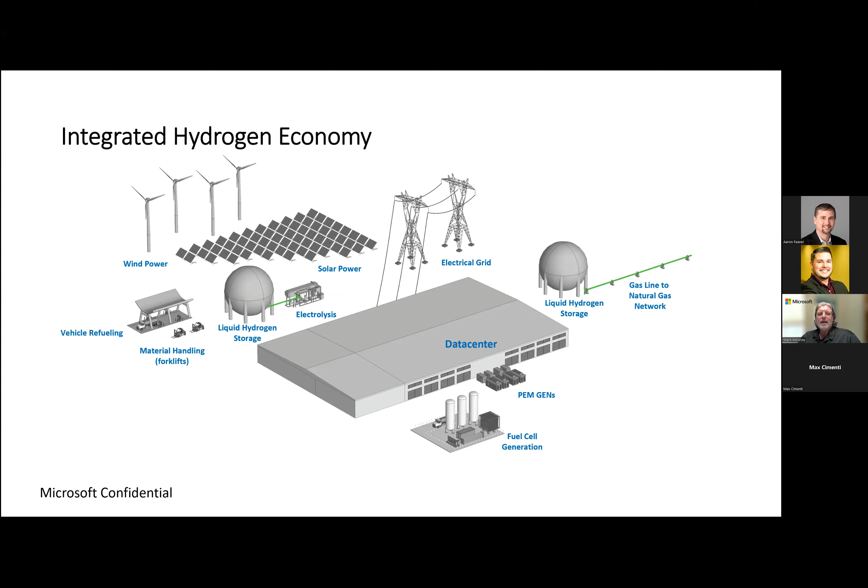Maybe we put some electrolyzers in so that we can do more firming of renewable energies and interact with the grid. Maybe we take the boil off and build vehicle refueling stations so that we participate in a local economy. Maybe we share with natural gas blended lines, and maybe build our storage tank a third larger than we need, and participate with local hydrogen elements.

So we're very interested in being integrated into this hydrogen economy, not just being a consumer of the hydrogen for the backup systems. But as you can imagine, we talked about 12 to 48 hours. A typical size of a data center, or at least a module of a data center that an Amazon or a Microsoft or a Google or Baidu or Tencent or one of the hyperscalers might use is around 30 megawatts.

And we're going to need 100 tons of hydrogen on site, ready to go in case there's an outage. And that's quite a bit. So we've been working with various folks, the industrial gas providers and the fuel cell providers, on how we might meet these storage requirements and what other purposes we might use it for as we go forward.

So we're very encouraged by the idea of zero pollution power generation. Of course, if we do that, then we may be able to use it for more than just backup power, but as I mentioned, for grid interaction and ultimately for primary power, if we meet the dollar per kilogram goals that the Department of Energy has put forward. So I'll leave it at that, and we can go to question and answers.

Fantastic. Thanks a lot, Mark. Very interesting. I'm glad to see the Quincy data center being highlighted. My hope is that we'll be utilizing that Cummins electrolyzer just up the river from Quincy to make some hydrogen, so you guys can use it for backup power. So that'd be great. Happens there.

I want to kick us off with a question that's shamelessly geared towards my own self-interests.

As somebody who focused on critical materials challenges, and also as someone who has spent most of my career in the electrochemical space, primarily in battery materials, we've seen the battery industry growing explosively over the last decade or so. Electric vehicle adoption is approaching 10% now, so we're talking about really, really high volume. And the challenge they're seeing in the battery space is they did not do an adequate job of focusing on the supply chain ahead of that massive growth. Now we're retroactively going back and saying, wow, we've relied too much on cobalt and the supply chain is not robust.

We've got all kinds of folks focusing on how do we avoid sourcing cobalt from the Democratic Republic of the Congo, where most of it comes from, and Chinese supply chains and things of that sort. So it's a big, big challenge. And what I'd like is to help make sure that the hydrogen economy anticipates some of those same challenges, because it'll be the same thing all over again. All of the platinum group metals are in short supply.